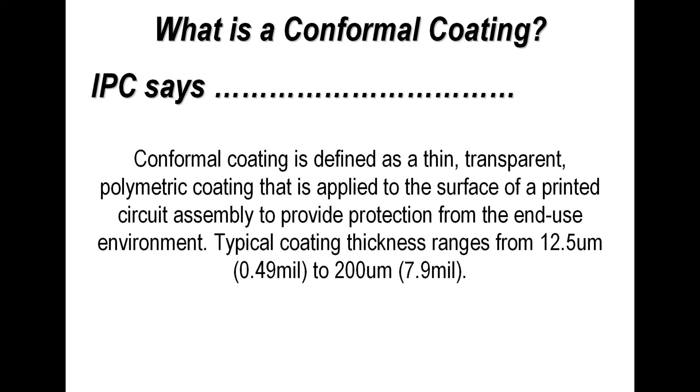So let's consider for a moment what is a conformal coating. IPC's definition of a coating is a thin, transparent polymeric coating that is applied to the surface of a printed circuit board assembly to provide protection from the end-use environment. Typical coating thicknesses range between 12 to 200 microns.

So let's ask the question now, why do we want to conformal coat a printed circuit board assembly? There are a number of different reasons. First, to prevent premature failure of a product, which can be corrosion, erosion, chemical attack, or some form of electrical failure because moisture is getting to the surface of a printed circuit board.

In some instances, with more sensitivity of circuits being used on modern portable products, people are using conformal coatings to maintain or enhance a particular section of the printed circuit board or a particular component's functionality. So localized coating provides some benefit there.

Improved environmental protection is probably the most common reason stated for the use of conformal coating. It's also an alternative to a sealed box environment. Rather than putting a product into a sealed box, we have the ability to coat the product and not use a sealed enclosure. This may actually reduce the cost of the final product.

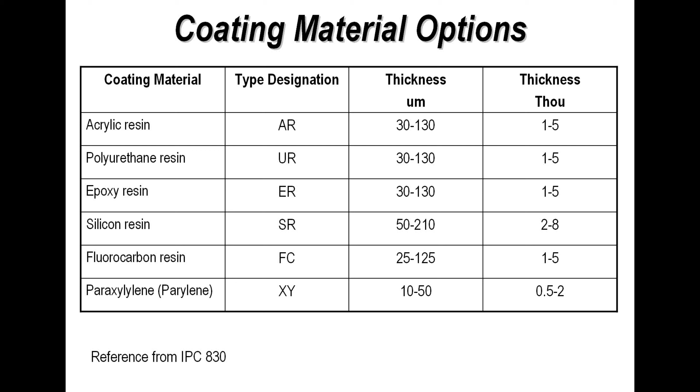Another document we'll refer to later is the NASA workmanship standards for conformal coating in printed circuit board assembly. This document is freely available online - you just have to do a Google search for it because it's hidden away somewhere on the internet. But you can find it, and there are quite a few pages that relate specifically to conformal coating, and it's quite a graphically well illustrated document.

Another source of information is some wall charts that I've produced, and these are colour standards for inspection and quality control of conformal coating. These are often used on my own hands-on workshops, and they're generally about 24 sheets which make up a good reference standard.

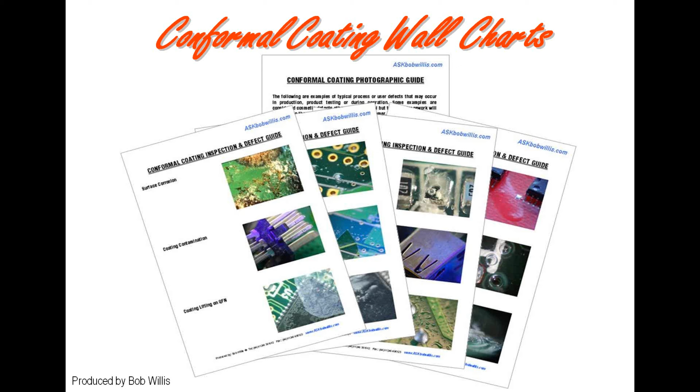Two other things we've recently introduced with the IPC and the SMTA in America are an interactive conformal coating CD-ROM and also a photo CD, allowing you to create your own training material.

Before we go any further and look at inspection and quality control of the process, let's pick up on the two basic processes that are most common in our industry today.

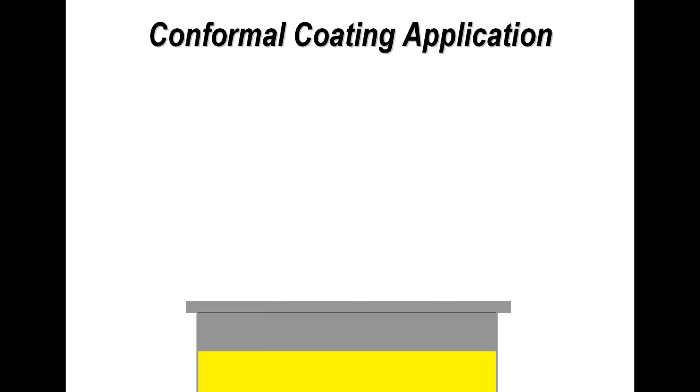By experience and by examining boards after the coating process, you can judge the dip time in the material. It's also affected by the viscosity or solids content in the conformal coating material. By doing trials, you can determine and maintain the coating thickness on the surface of the board. The way and speed at which the board is drawn out of the coating bath will also affect quality, consistency, penetration, and coverage on sharp edges.

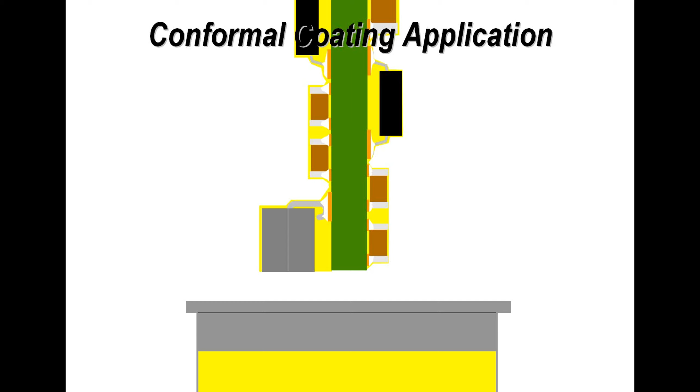In dip coating, generally speaking, depending on the parameters already mentioned, you get a thicker coating. However, if you change the viscosity or one of the other parameters, you may change the coating thickness. The key thing with dip coating is that correct masking must be conducted on the printed circuit board over component areas that mustn't be coated.

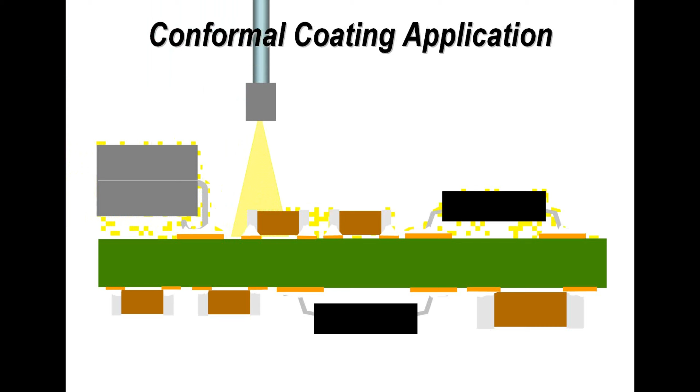The alternative to dip coating, becoming more popular, is spray coating. When we talk about manual or semi-automatic spray coating, we're talking about a one-sided process. We spray coat across the surface of the board, coating the whole surface in multiple strokes. This depends on the speed, nozzle size, height of the nozzle above the board surface, and of course the materials being used.

One benefit of automated coating is that we can program the dispense nozzle or dispense system to selectively coat certain areas of the board. Provided there is enough gap tolerance around components, this allows us to virtually eliminate masking. It's very difficult to totally eliminate masking, but it's something we can nearly achieve with this process.

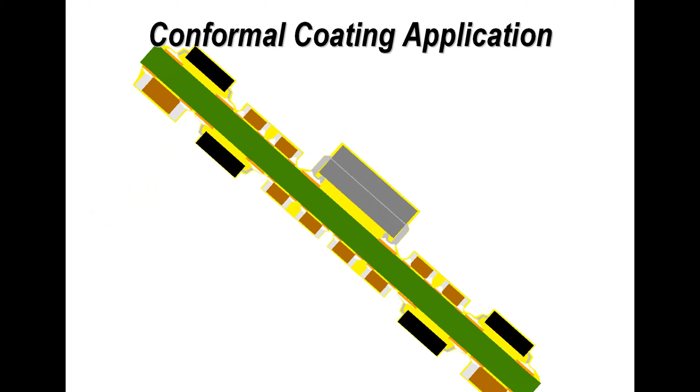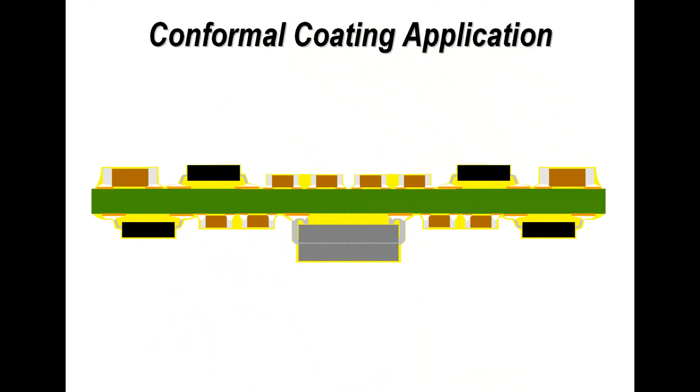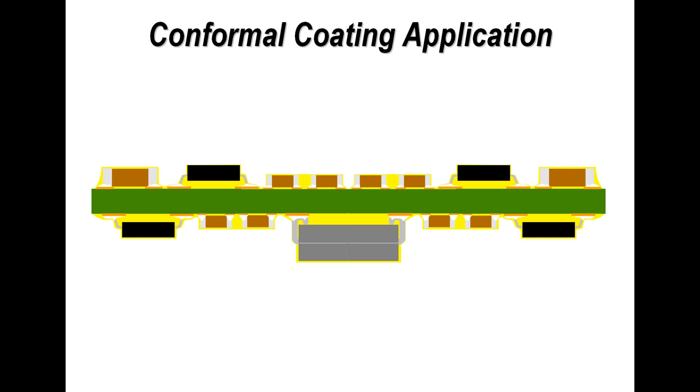If we're doing double-sided assembly with spray coating, we have to do one side, then turn the board over to do the second side. With dip coating, this is conducted on both sides simultaneously. You would not be able to lower the board horizontally into a dip coating process and lift it out, because the variation from side 1 to side 2 would be quite dramatic.

So what is the actual sequence of assembly, or the actual sequence of the coating process? Well, first of all, we clean the board assembly.

So what do we actually have to do? Well, that depends on your product and application. Cleaning the printed circuit board assembly is a common process with conformal coating, however it's not necessarily mandatory, and you have to decide. If you take a lot of automotive manufacturers, the majority do not clean, however they do conformally coat. They must engineer their process to minimize the amount of contamination present from any previous soldering operations.

The next step is masking selected areas depending on the design of the board, then we coat side one of the assembly, possibly allowing the board to dry or touch dry prior to flipping it over. If it's an automated process and you're spray applying the coating, you would flip the board assembly over and continue coating the second side.

Inspection needs to be conducted at some point, and sample inspection is good, but remember the board is either wet or tacky, so it must be a non-contact method.

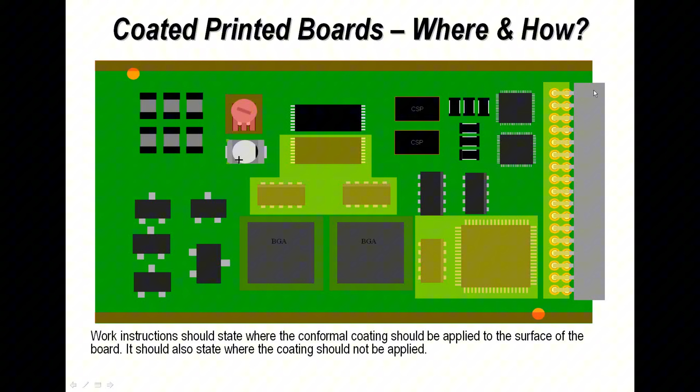It depends on your system and the results from your trials, but you must have some basic reference. Also, if you're subcontracting this product for coating, it's very important to give this information to your supplier—a drawing, a photograph, or ideally a golden board.

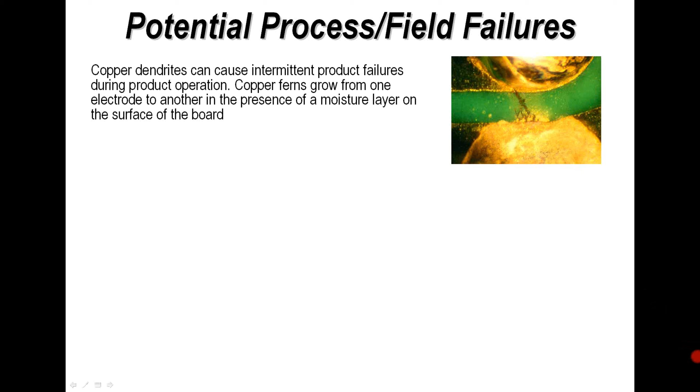Now let's look at some failure modes of printed circuit board assemblies. The first is dendrite formation. In this photograph you can see examples of dendrites, which are a copper corrosion product. Basically, a plating cell forms between one surface and another, and the black area is a copper growth, a copper dendrite—a quite common failure mode seen on printed circuit board assemblies.

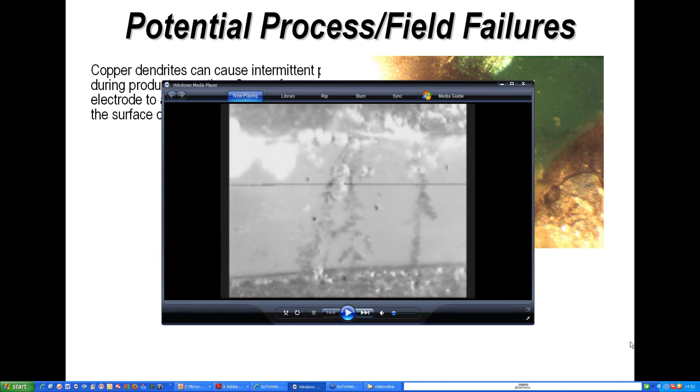If we jump to a video clip, we should be able to see this in real time. This illustrates dendrite formation—dendrites forming between two conductors on a printed circuit board assembly, shown in real time. However, because there's quite a large droplet of moisture on the surface of the board, this is happening much faster than normal. In a typical situation, this may take weeks or even months to actually form.

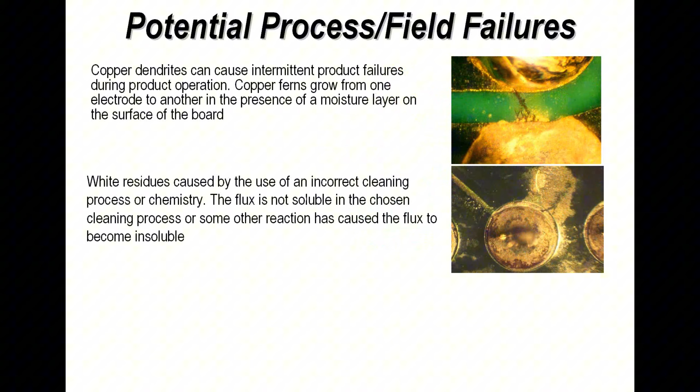Another example is white residues and corrosion products on the surface of a printed circuit board. White residues quite often aren't harmful on their own, but if combined with dendrite formation, that may be an issue.

CAF is another failure mode that can occur in a printed circuit board assembly, but this is an internal defect, and conformal coating would not necessarily stop it from happening.

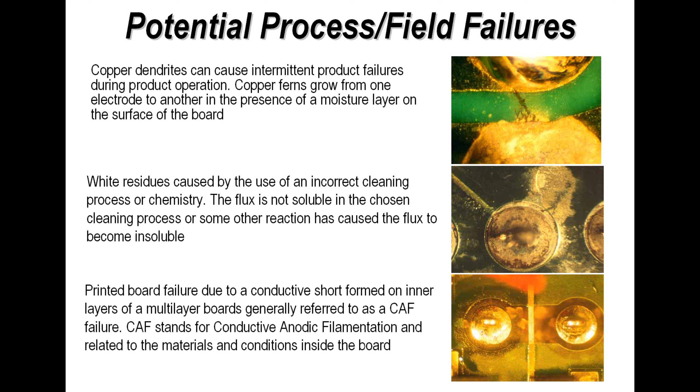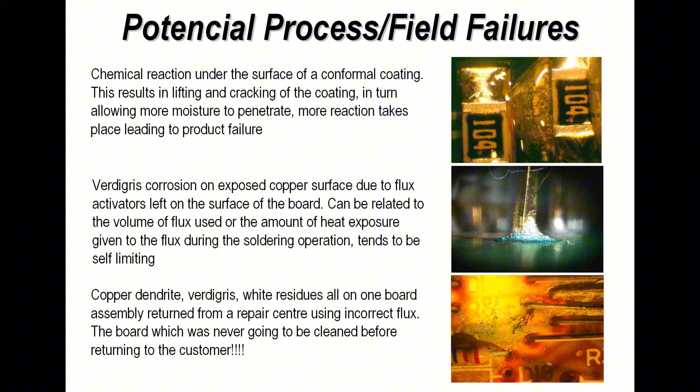So we've got white residues, we've got copper dendrites because of moisture and applied voltage, and corrosive materials and verdigris, all three in one place.

One final thing I wanted to mention, something that's come up recently in the last few years, is people using silver finished printed circuit boards. There's not a problem with using silver, but silver in combination with exposed copper in a sulfur environment can actually lead to corrosion.

What I illustrate in the photographs here is an area where corrosion has taken place and actually eaten through the track and pad interface. The X-rays below show the same thing, and you can see what appears to be mouse bites in the surface of the copper, which in time would go all the way through. In the bottom photograph you can see corrosion products actually starting to span between two pads and two terminations.

On an SOIC, this is to do with sulfur in combination with silver and copper surfaces.

And finally, just an example of a BGA, a ball grid array, where you can again see, using an endoscope or similar equipment, directly underneath the package the black deposit which is starting to form between two closely spaced conductors.

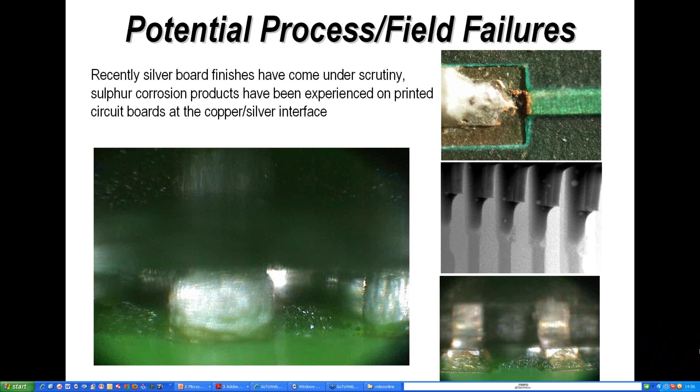Okay, so that's some of the failure modes. Now finally I wanted to mention one other process, conformal coating process, and the reason for mentioning this is it's considered to be the Rolls-Royce of coatings. However, it's not appropriate for every application. It's an expensive process, but it is unique in that the coating is defined very tightly because of its process.

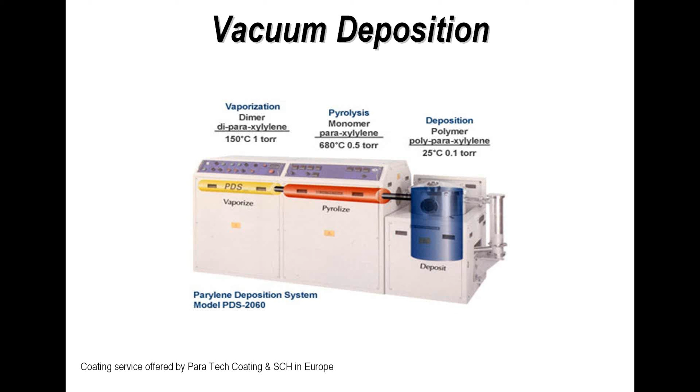Basically, vacuum deposition, or the parylene coating, involves putting a board assembly into a chamber, and what is actually happening is a gas is condensing onto the surface and forming the coating. So as opposed to spraying or dipping, we're actually using a vapor transfer process to produce a coated printed circuit board assembly. Normally this is always contracted out; it is not normally an in-house facility.

The interesting thing with this coating, as I said earlier, is that because it's applied as a vapor process, it is absolutely consistent. So if you define the process and you want, let's say, 10 microns, 15 microns, or 30 microns, then that is what you will get, consistently on all surfaces.

However, because it's a vapor deposition process, the masking of areas that must not be coated must be absolutely perfect. If there are any gaps, any apertures which allow the coating to penetrate, it will penetrate and contaminate those surfaces.

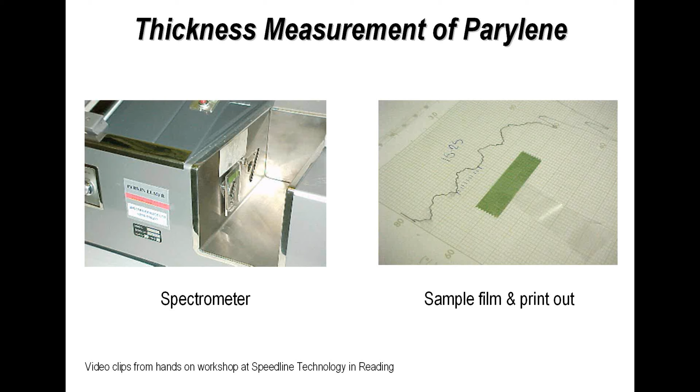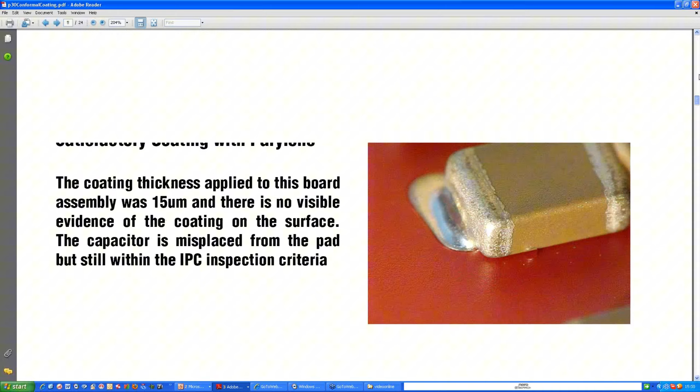As an illustration of some coated printed circuit boards and some of the joints and what they may look like on a printed circuit board assembly, as I said previously, I quite often use quality control charts for illustrating this. I wanted to show a few examples of joints that have actually been coated, just to give you an idea of what to expect when we talk about inspection and quality control.

Now, first of all, I show you some individual joints that have been inspected under ultraviolet light. As we'll hear a little bit later on, ultraviolet light is something which is important as an inspection and quality control technique during conformal coating inspection. And I'm showing an SOT23 which has been coated.

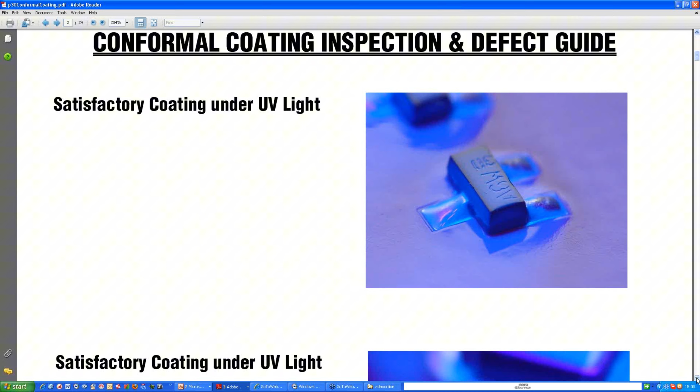It's being inspected under a UV light, and the photograph illustrates perfect, consistent coating.

The next illustration is a simple capacitor on a printed circuit board assembly. Again, we're inspecting this under ultraviolet light, and you can see that it's apparent around all of the termination of the device, on the surface of the board, and also on the top.

Now, a lot of people say that the intensity is an indication of the thickness, and in some cases that is true. So when you're looking later on at complete board assemblies, the intensity of the glow gives you an illustration of the thickness, but you cannot use that as a total guide.

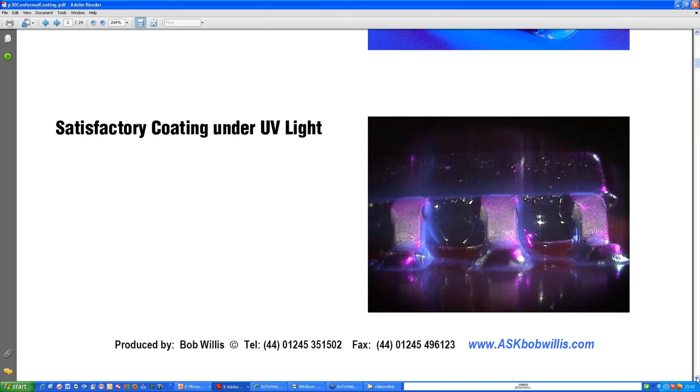Another photograph shows an SOIC, and again we've coated the printed circuit board, and you can see the conformal coating over the surface of the terminations, the body of the part, and also between the individual terminations on the board. For conformal coating to work, the most important area is between electrical terminations. So this is a critical area to do your inspection to make sure there are no defects which prevent an insulative coating from being present.

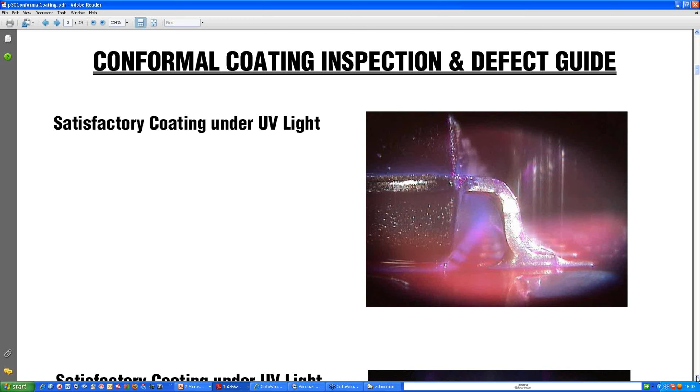A couple of sideways views, if I may. This photograph shows you a sideways view of an SOIC. It could be a QFP, but just a gull wing termination. Again, you can see how the UV coating fluoresces during inspection, which allows you to gain an idea of the coating, and if the coating is present around the terminations, underneath the terminations, and on the body of the device. And just another view here to show you a similar termination, but on a smaller device with smaller gull wing terminations. In all honesty, you are not going to inspect to this level.

You are going to do a general inspection over the whole of the board assembly. However, you still need some sort of inspection and quality control reference when you do investigation. So if you find a defect or a blemish you want to look at in more detail, you should still have some sort of reference standards to allow you to inspect. So that's just an example of some typical solder joints.

And what I wanted to do now is show you some solder joints that have actually been microsectioned. This is one of the techniques which can be used to assess the thickness of the coating, and this would typically be used when you're verifying a process, when you're initially setting it up to get a feel of the performance of the coating process you're using, the material, the solids content, and also the difference across surfaces, where you're coating sharp edges and flat surfaces.

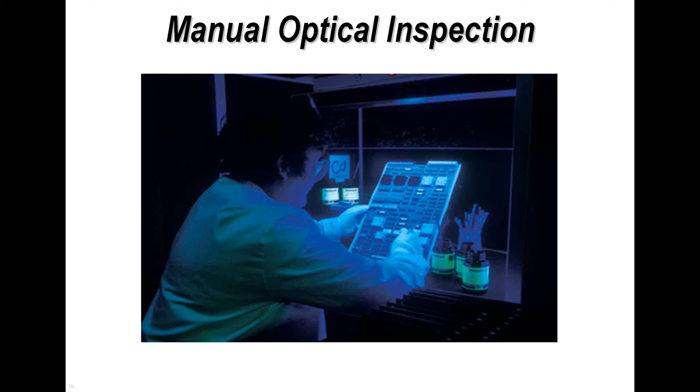Now, when you're doing in-process inspection, perhaps when you're doing audit inspection in manufacture, it's useful to consider buying yourself a UV torch, a UV light. I have one of these, I use it myself, and surprisingly it's very, very good for sample inspection if I'm at a customer or just doing sample inspection on the shop floor. It's enough to illustrate a good, successful coating process.

You have to decide what you actually require. Generally speaking, when you're using a microscope or a higher magnification, you're doing investigation. You're generally not doing board-to-board inspection.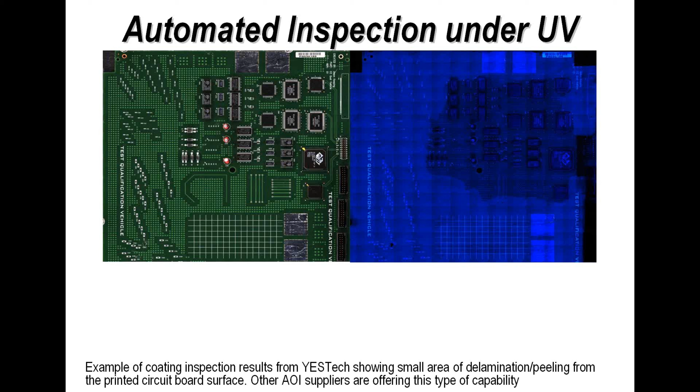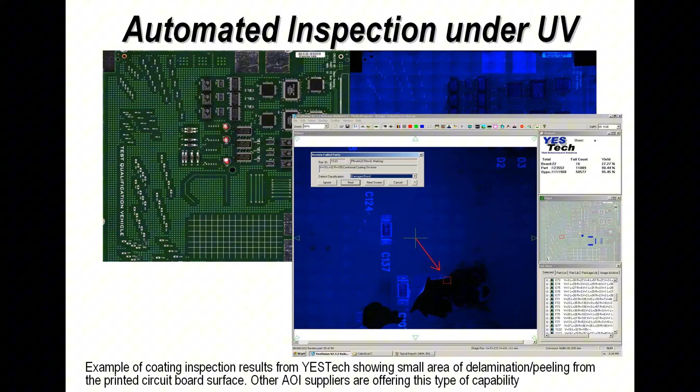So I show an example of a typical board assembly which has been coated, and this is the view that you might see during AOI or automatic optical inspection of a board assembly. The next view just shows a close-up of an area which has been inspected, where the software is being defined to say what is acceptable or unacceptable on a printed circuit board assembly. This doesn't come all pre-programmed in, meeting the requirements of your particular inspection criteria—this is something you need to do yourself. So you're teaching the assembly what you like and what you don't like.

Moving on to the more practical side of the inspection and quality control, I've listed here some things to consider. First of all, coating material quality and suitability.

That's really outside of the control of production staff and engineers—it's probably been defined by design or development groups. But it's important that when you've got the materials from whichever vendor you're going to be using, you make sure you store them, control them, and follow the material manufacturer's recommendations. They will define what needs to be done to get the best out of the materials and also to maintain the materials at a suitable standard.

Process control of materials and application, just like any other manufacturing process we use today—it's important to pick selected parameters to monitor. You're not necessarily monitoring daily; you may be doing this once a week or once a month, but monitor the performance of the process against your quality levels. Board surface preparation, cleanliness, solder mask type.

You've got to decide whether you're happy with a coating being applied to an unclean board, but it is not uncommon practice to do this. One thing a lot of people forget about is the solder mask type. Solder mask varies from supplier to supplier because there are different materials in the industry, so the adhesion of your chosen coating to a mask is probably one of the biggest problems industry faces.

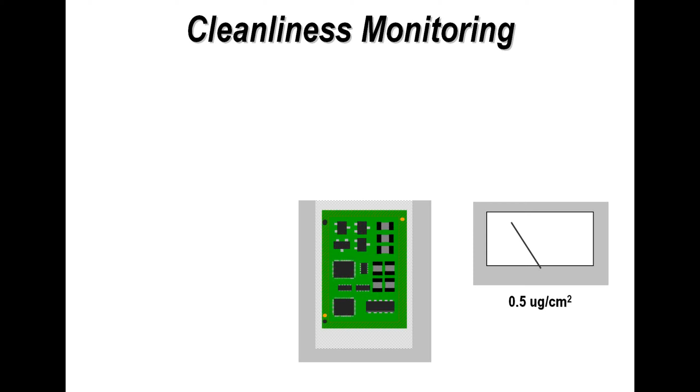First of all, in terms of cleanliness, most engineers are quite familiar with monitoring cleanliness. Basically, if we're checking cleanliness of a board assembly, this is conducted using an ionograph or similar equipment, and we're actually measuring the cleanliness of the board based on the change of resistivity or conductivity of a test solution, which is a mixture of alcohol and water, either 75% alcohol 25% water, or 50% alcohol demineralized water.

There are standards for the level of cleanliness of a board assembly, and this is a judgment for ionic contamination on a board assembly. So that's pretty standard practice in our industry.

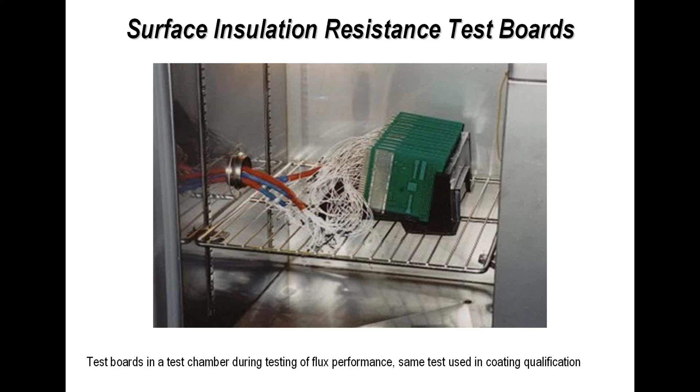Another technique which is used, but normally in process development, is SIR, surface insulation resistance. What we're doing here is confirming the consistency and quality of the test boards and board assemblies after going through a number of different processes. What you're seeing here is a rack of boards sitting in a test chamber after they've been connected with a voltage, and we're monitoring the changes in surface insulation resistance on the sample.

Now today, fortunately, this can all be done automatically, and on the next slide, this graph actually shows you the results that you might get after processing a special test coupon.

You're looking at the voltage resistance over time, and what you're seeing here perhaps is that the blue line illustrates a failure. We've subjected the board assemblies to a hostile environment, and we've seen a drop in the insulation resistance, and it's not recovered at all.

The green line, the light green line, where you're seeing a little blip, perhaps is an area which might be questionable on one of the test coupons, and perhaps the rest of the test results you're seeing are satisfactory. Again, you set your criteria based on international standards, but this is a measure of the performance of the whole process, so that all the materials, the coating, etc., under adverse conditions.

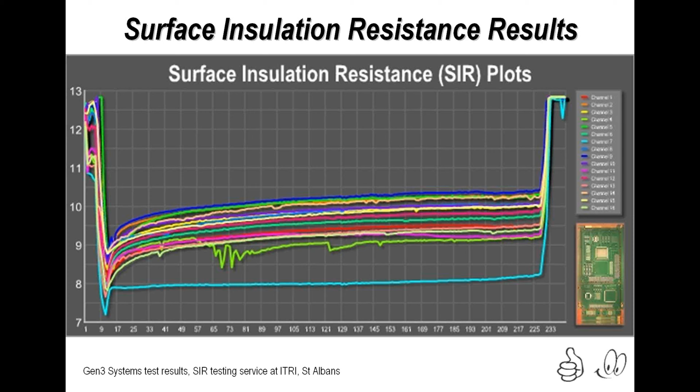So let's look at now some practical things that we can do in terms of inspection and quality control in our process. First of all, simple process checks. We can do thickness measurements with wet film gauges, and this is a simple thing, and we can compare the readings we get with the readings of the board after the curing operation.

The reason being that when you're applying a coating to a printed circuit board, the carrier will evaporate, so the actual thickness will be dependent on the solids content of the material.

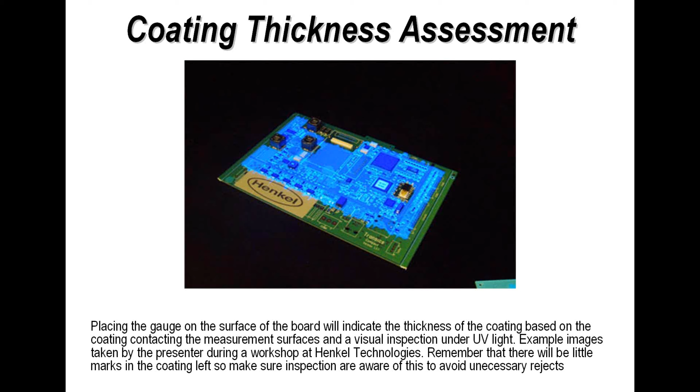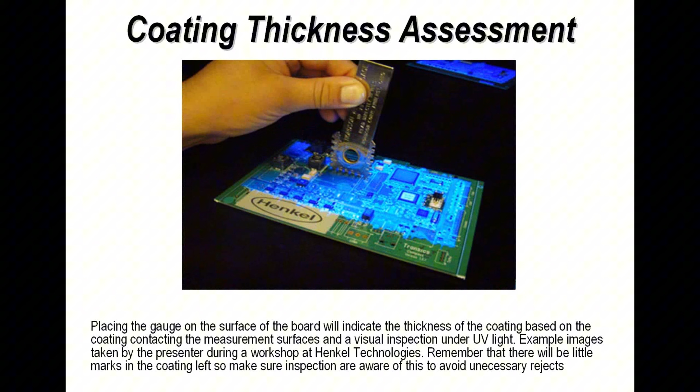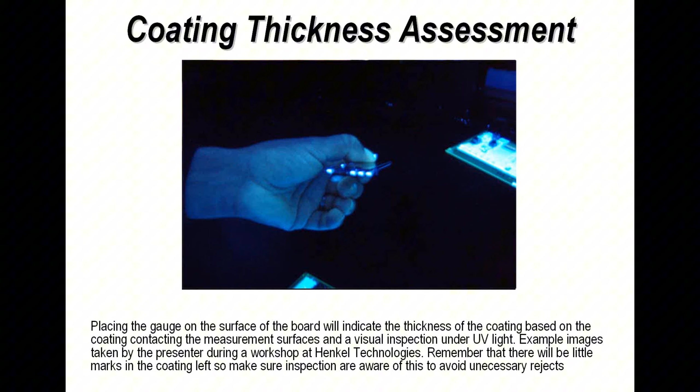In this example, I show a board assembly. It's been selectively coated, and now what's going to happen is we're using a wet film gauge, and we're going to place this on the surface of the printed circuit board. And when we lift the wet film gauge off of the surface under a UV light, we'll actually see where the coating is present on the gauge. What you can see is those individual teeth on the gauge illustrate variations in thickness on the coating.

Now, other things that you can do from a quality control point of view, and I think which are beneficial, is coat sample boards, blank boards or blank substrates or test cards. The reason for this is, first of all, find out the capability of your process.

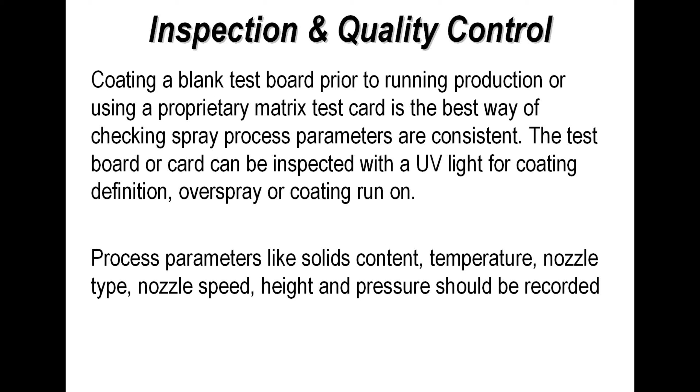And this is particularly true in spray application. With spray application, we are perhaps not aware of the thickness because we can't see it. So again, if we look at coverage and the quality and consistency of coverage, we know the capability of the machine before we actually move on to spray coating actual assemblies.

I show here an example of some test coupons as opposed to a test substrate or a test board. Test coupons are available from one particular vendor, but I'm sure it's something that you can make up yourself. Nordson have been using these for many years, and what you're looking at in these three views are, first of all, a blank card and a card that's been sprayed, and it allows you to see the definition of the width of the spray.

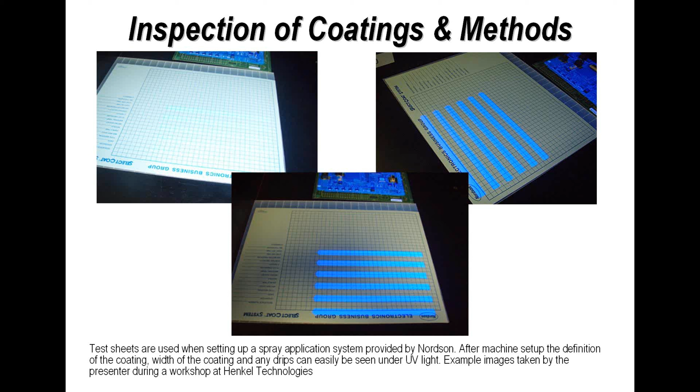It allows you to see the stop-start sequence, if there's any overspray on the surface when you put it under a UV light. So it gives you an illustration of the quality and consistency, and you can make a check of all the different parameters.

The height of the nozzle, the solids content, the spray pressure, the materials you're using - all those different variables - and look at the performance. It is very difficult to do this investigative work on a board assembly which is covered with components. I know that's the real end result we need to do. However, it's also important to see the capability of your process before you actually start, and it's something you can do at the start of a shift, after maintenance, or when trying out a new nozzle or new material.

Again, it's relatively simple. Now another thing which is important, and sometimes people forget to do this, is actually measuring the viscosity of the materials that you're using. The manufacturer of the material gives you guidelines on the viscosity to use in manufacture, and this video clip will illustrate the simple viscosity check.

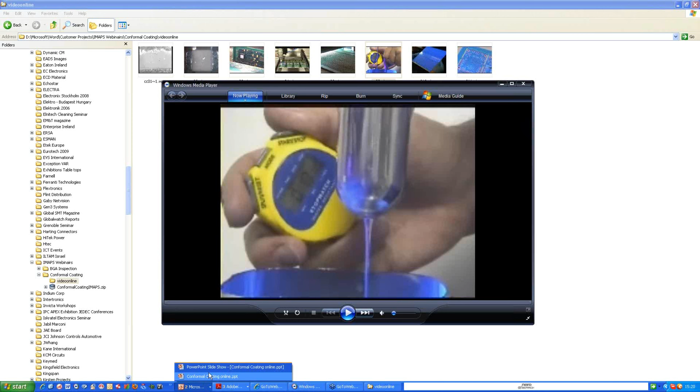Basically what I'm showing you is measuring viscosity using a tool which is widely used in the industry. What we're doing is filling up the container with a quantity of material, and we're timing when we start and when the fluid stops or breaks. By doing this, we can have an understanding of the relationship of solids content.

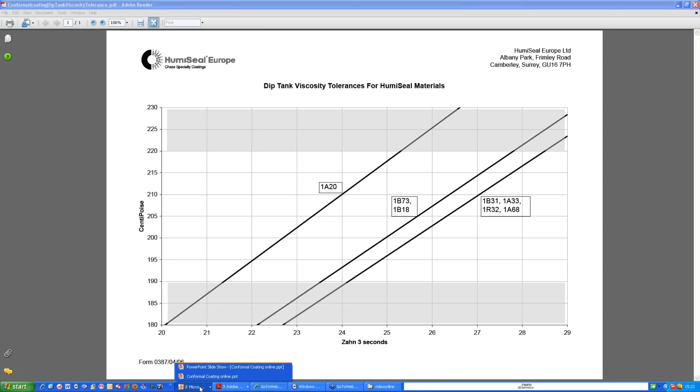Again, you're checking your material during regular monitoring. These are called Zahn gauges. There are other automated methods of doing viscosity checks, but this is a popular method used in the industry. Remember, we're measuring or checking the solids content of the material, and obviously if the solids content changes, just like with a liquid flux in wave soldering or selective soldering, it will affect the performance - and certainly in terms of conformal coating, it will affect the thickness of the material applied to the surface of a printed circuit board.

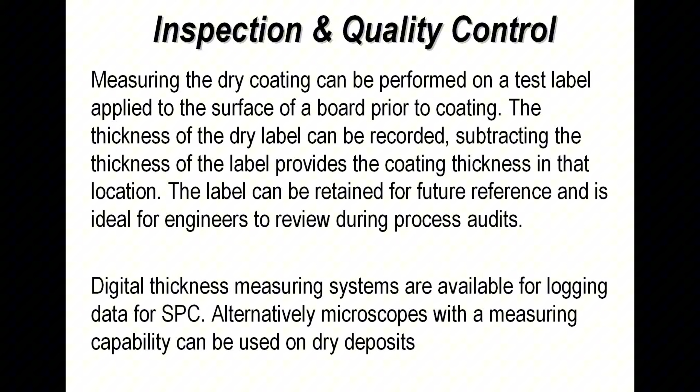Measuring the dry coating can be performed, and this is another thing to be considered. There are different ways of measuring dry coatings - we can use thickness gauges, we can use microscopes that have a capability to do measurements, or we can use labels that we apply to the board, then remove them from the surface and check the dried coating thickness, subtracting the label thickness.

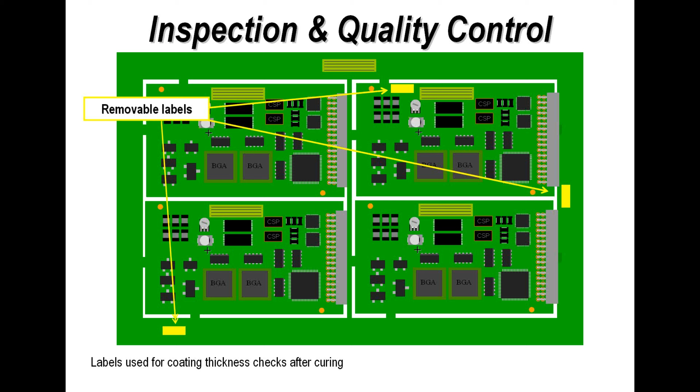In this example, what I show is a board with three labels on it. Two of them have been put on the waste area of the board, and after coating and curing, the labels could be removed and you check the thickness. The thickness will vary on different areas of the printed circuit board, and as long as you know the relationship of both, you can use it as a quality control test. Again, you don't have to do all these checks - this is just an illustration of the different checks you could consider running.

With care, you can also do inline inspection, and inline inspection could utilize the UV torch that I illustrated earlier, or it could use the Vision Engineering Mantis type system hanging over an inline conveyor system, or of course an automated AOI system.

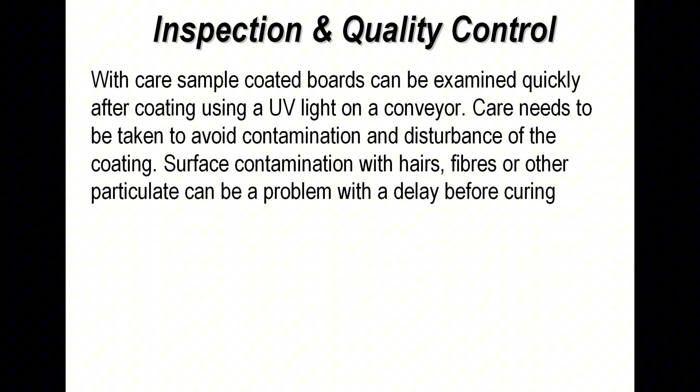If you cure it too fast, what can happen is you'll form bubbles, and that's something you want to try and avoid.

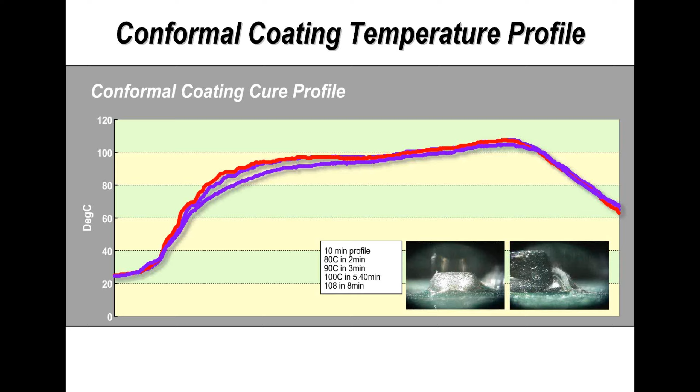Just an illustration, some photographs I have here. This is a coating - it's quite a thick coating, as you can see. But if I were to speed up the curing of this coating and show you photographs of this, what you'll actually see is a lot of bubble formation. You can see bubbles in the coating between the termination on this resistor network, and you can also see it between this SOIC - something we need to avoid during our curing process.

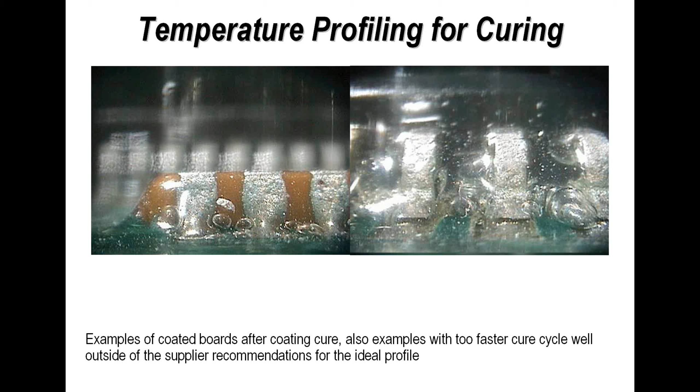So it's all in your control. When you speed up a coating curing process, this is one of the things that you can actually see, which is something we need to avoid.

Inline curing can be in an inline process with a mesh belt, or it can be with pin transfer, just like a reflow soldering system. Again, it depends on the material you're using and the application.

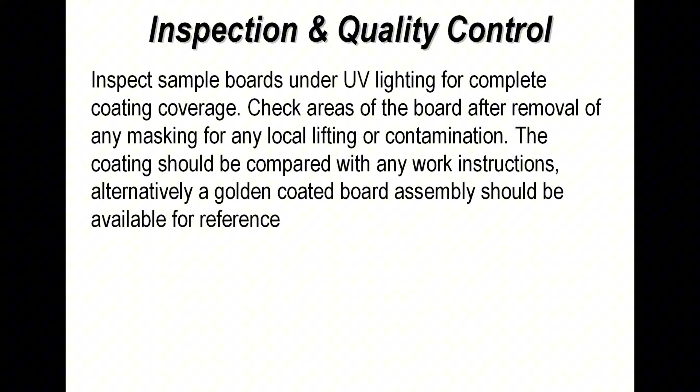So we've gone through the inspection process that we can use, but just think about the criteria and also think about having the instructions available so it's clear to everybody, and also consider possibly a golden board as reference.

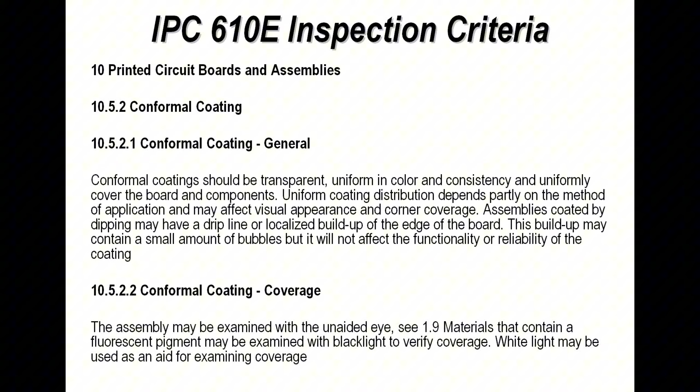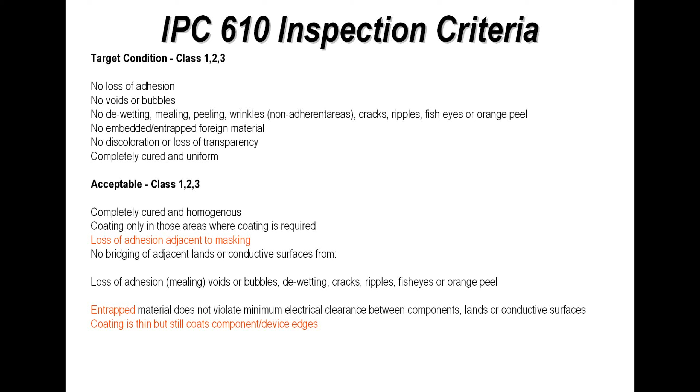On the next slide, again, I've taken the text from the IPC standard, but because the standard has recently changed from D to Rev E, I've also highlighted changes. Now, there are not any radical changes, but they have removed some things. For the first red point, they've taken out loss of adhesion adjacent to masking. What they mean here is the masking which is used to protect selected areas. But because loss of adhesion is covered in other parts of the standard, they've decided to make that simpler. They also had coating is thin, but it's still coating component and device edges, again illustrated in another part of the international standard.

Now, I show some photographs in the next slide, and what I recommend to companies is they enhance the documentation that they have rather than just training to the IPC. IPC has defined the standards, but I think it's important to actually have illustrations of each of the types of defects that they talk about.

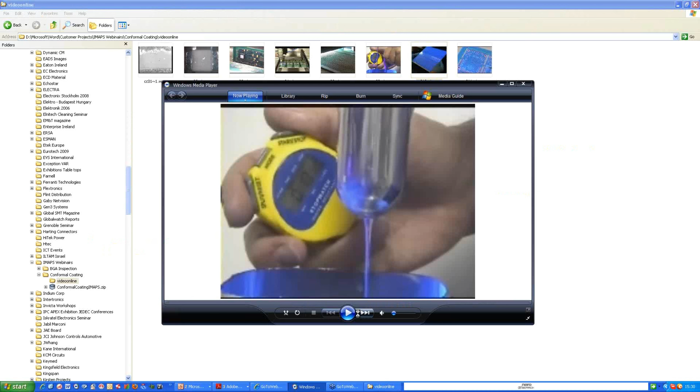The key thing with inspection is looking for good coverage on the whole of the printed circuit board. One of the things that we do for inspection, which we've already previously mentioned, is through the use of ultraviolet. This video clip just shows an operator inspecting a printed circuit board assembly under ultraviolet light. Basically what he or she is doing is scanning the whole board assembly and comparing it with whatever instructions or golden board or inspection criteria is available.

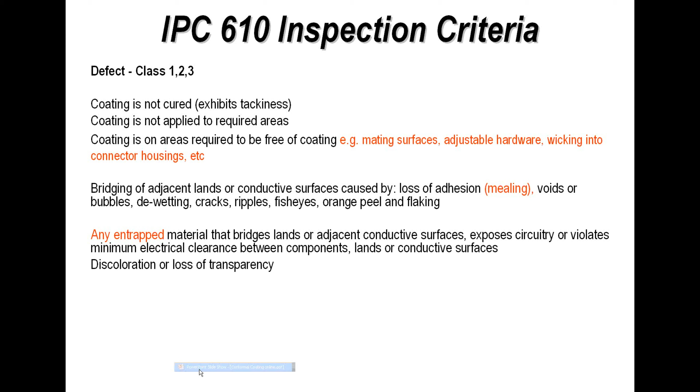In this particular assembly, there are a number of areas where masking has protected the board assembly, so some areas are free of any coating material. Again, it's having the inspection capability available to allow you to do this. Now, thickness of coatings is something that can be quite difficult to actually do in practice, but if you are going to do thickness measurement, there are guidelines within the IPC, as I mentioned earlier, and I've illustrated them here.

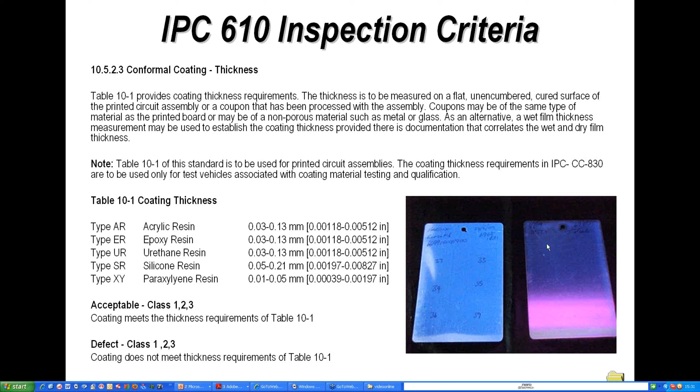On the right-hand view, these are test plates which have been produced and measured, so they're now a calibrated reference source, and the numbers marked on here illustrate the thickness. Using a digital measuring gauge, we can measure the surface and see what results you get from the calibrated sample, then use that to measure a reference board.

Eddy current measuring systems are available in the industry, but it's important to realize that an eddy current needs a metal surface as a backing reference. Not all systems are the same, so you need to try out different systems to see the performance you can get.

This type of measurement is always done on a dry coating. You would never do this on a wet coating. If you did, unfortunately somebody would be very unhappy because the gauge head may well be contaminated and damaged.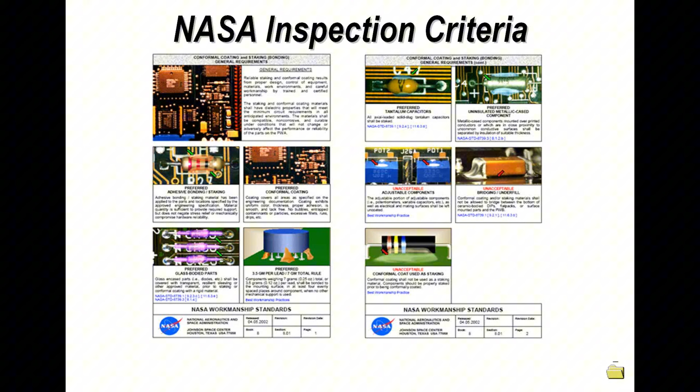I just flicked through a couple of pages of the NASA standard to give you an insight into what the document looks like, and you can review this at your leisure when you receive a copy of the slides, or when you search for the NASA criteria online.

In terms of process defects, for soldering but also for conformal coating, one of the things we've recently introduced at the National Physical Laboratory, where I also work with Dr. Chris Hunt, is an online defect database, which you can use yourself to look at defects and also submit defects to get an answer to the potential reason for them.

I'm showing you an example of the front page where you can select different search criteria. So if you were to put in, say, conformal coating and bubbles, or conformal coating and corrosion, into one of the search strings available, selected from the pull-down menus associated with each topic, you'd be able to look at illustrations.

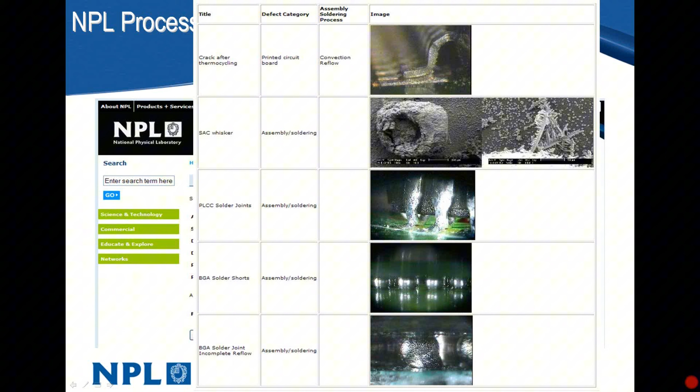What I show you here is we've pulled up a number of photographs from the database, and then you would select which one looks like the particular defect you're currently investigating. The next step, you select one by clicking on the defect type or photograph, and that takes you to another screen in the database.

In this case, I've selected for this illustration a defect on conformal coating, which is cracking of the coating. On this screen you can read what actually happened, the possible causes, where it occurred in manufacture, and potential corrective action.

The nice thing is we can look at whether it's a high volume problem, a small volume problem, or in fact what type of product - is it a medical application or something else?

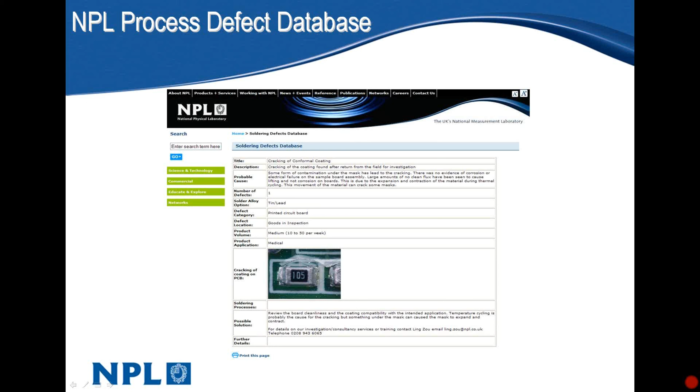Finally, you can click the button again and blow up the screen much larger in size, which allows you to print this out with the other information and pass it along to production staff or engineers on the shop floor as part of a corrective action. The database grows month by month, but the important thing is putting in information that increases the quantity available for those wanting to use it for failure analysis. So that's a sort of database.

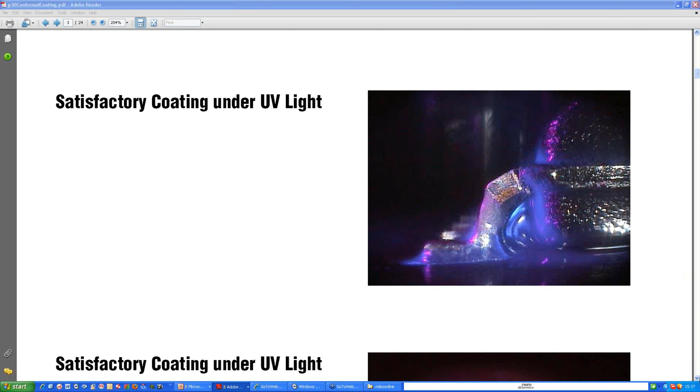Now going back to some of the illustrations I previously showed you on different joints, and giving you an understanding of what different joints look like after conformal coating, I'm illustrating here a J-lead termination. Here we've got what I consider to be satisfactory coating using UV light again of a PLCC, a J-leaded package, and you can see the glow of the conformal coating.

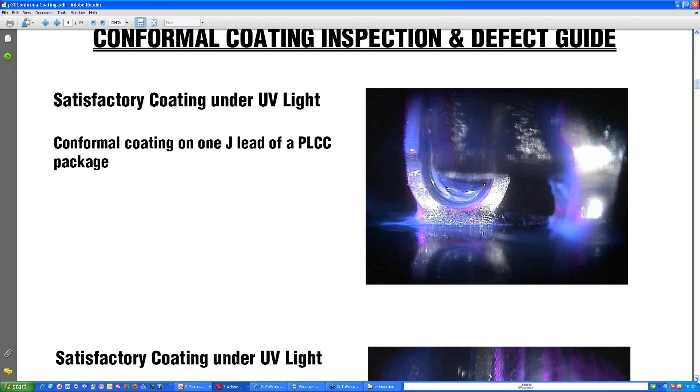If we look at the J-lead terminations and rotate it ever so slightly, at some point at this magnification you will see some surfaces that don't appear to be coated. If you're looking at high magnification with UV light, this could be down to the reflection as well. So it might appear there's no coating there, but by rotating it slightly you'll see, using the UV light, whether it is there or whether it isn't.

Remember that this type of high magnification inspection is really after you're doing some sort of analysis of specific defects. At board level, as I illustrated earlier, you're scanning the whole of the board assembly using simply your eyes rather than using high magnification. You're using a higher level of magnification as you move into some sort of failure analysis.

Now, in this illustration, this photograph, I show a PLCC again, a plastic leaded chip carrier, but you can see here that the coating does not appear to be present on the edges of the plastic. Now, this is a common thing which happens in conformal coating. On some plastic components, you can get poor coverage or even de-wetting on the surface due to the mold release compounds that are in the plastic packages as part of the fabrication process of the components.

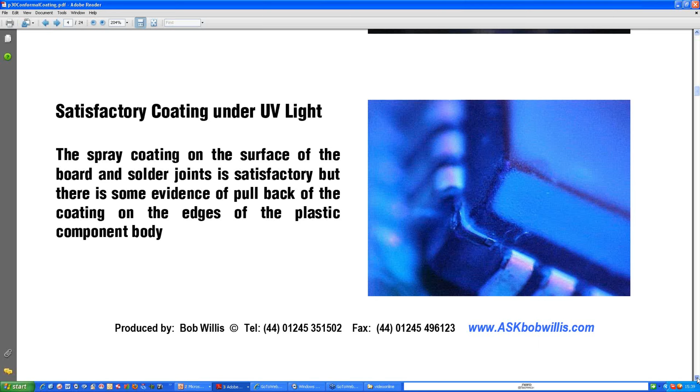Now, in this example, it's just simply because you've got sharp edges. You can see good coating coverage on two sides, but not right on the edge. But sometimes you'll actually get de-wetting as well.

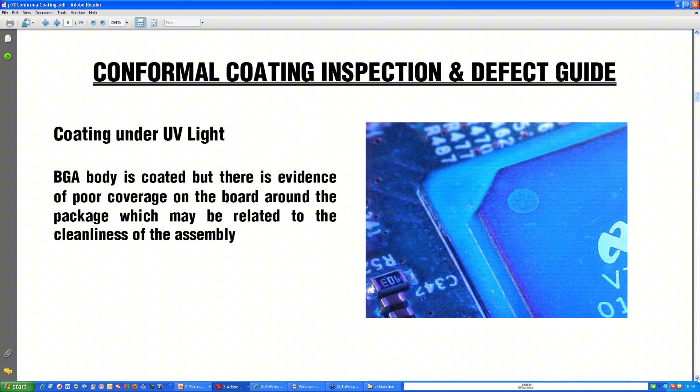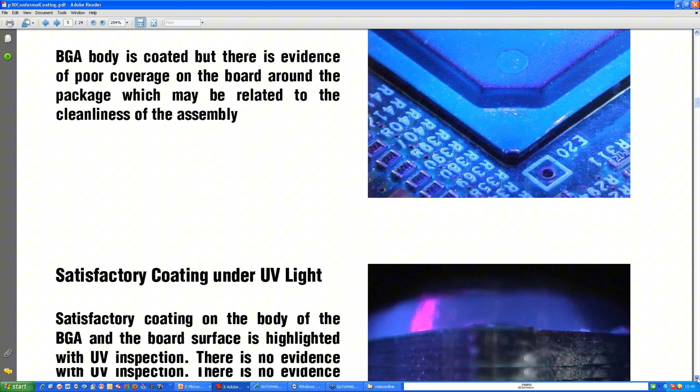But if we were to look underneath the package, you'll see that there is no coating underneath the package. You've got to decide on what is actually needed, and really that's down perhaps to development and design engineers to decide whether a coating needs to be underneath. And again, there is positives and negatives for doing this, as you probably can appreciate from a rework and repair point of view.

The next couple of examples I wanted to show is going back to the Parylene coating, and I said that with the Parylene coating it is very, very difficult to actually see. In fact, in my opinion, quite often if you're talking about a 10 micron or a 15 micron coating, it's virtually impossible to see.

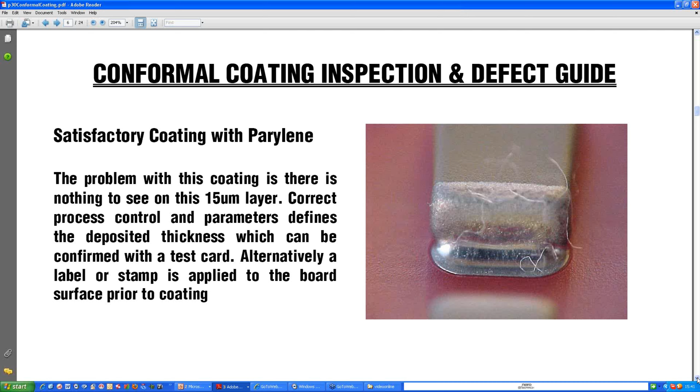But one of the ways you can do this is by actually putting, if your boards are going to be coated with this material, a very, very small dot inspection label on prior to coating, and then take the coating, take the label off, and then you can see the difference in visual appearance on the solder mask of the board with and without the coating. And also, if you're using a light measuring microscope, you can actually measure the thickness of the deposit from the top of the coating down to the solder mask. This is something which would work quite nicely.

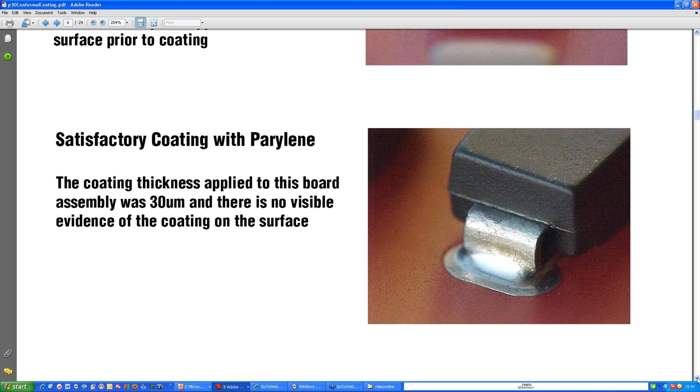Again, another example of Parylene, and virtually no evidence of the coating present. Just to illustrate the image that I showed earlier on about the coverage capability of this gaseous process, this photograph shows the grey line around the PLCC where it's 100% coverage.

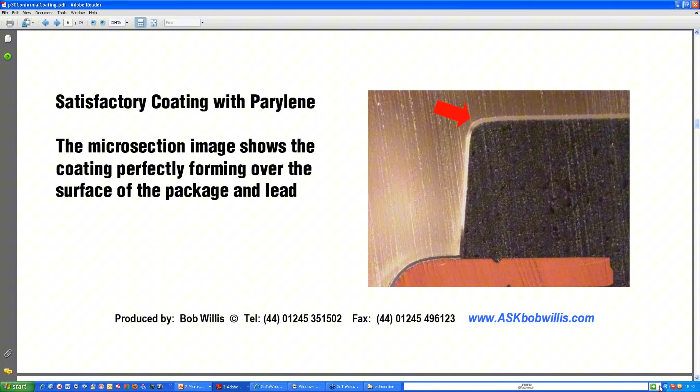So, just to illustrate, if you're going to have different photographs, different illustrations to aid your inspection, this is something you need to consider. What I show you here is just a few different types of defects.

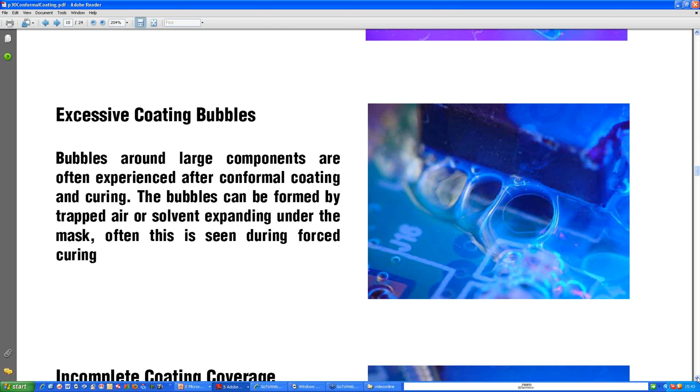Here we see bubbles forming around a component. Now clearly those voids and bubbles are between the package, terminations and other via holes on this particular product. So there is no insulator of any form. So this, in most people's opinions, would be unacceptable.